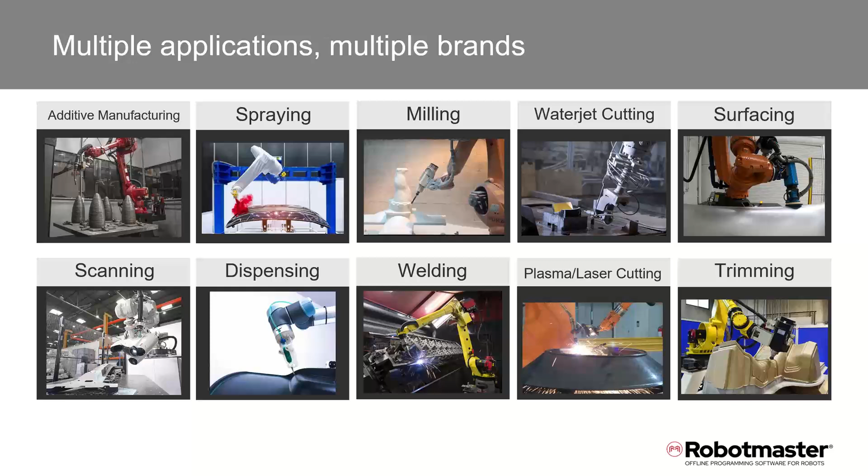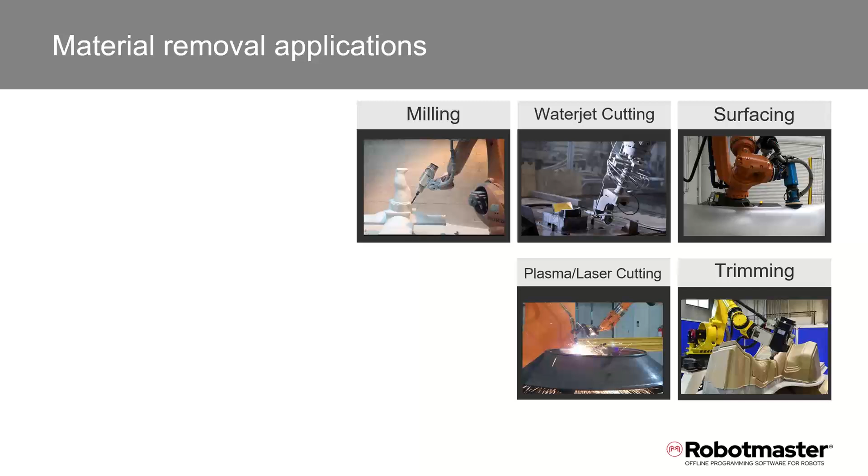Thank you, Jackie. As Jackie said, my name is Corey John. I'm one of the software sales managers here with Hypertherm and the Robotmaster product line. As we jump into the presentation, I believe most people are aware that many of the manufacturing applications you see today on the shop floor can be automated. One of the big pushes we see in the marketplace today is around the material removal applications. This can be anywhere from plasma cutting, water jet cutting, milling, trimming, and even surface applications. Today we'll be focusing on the surface applications, which can include things like deburring, grinding, sanding, and polishing.

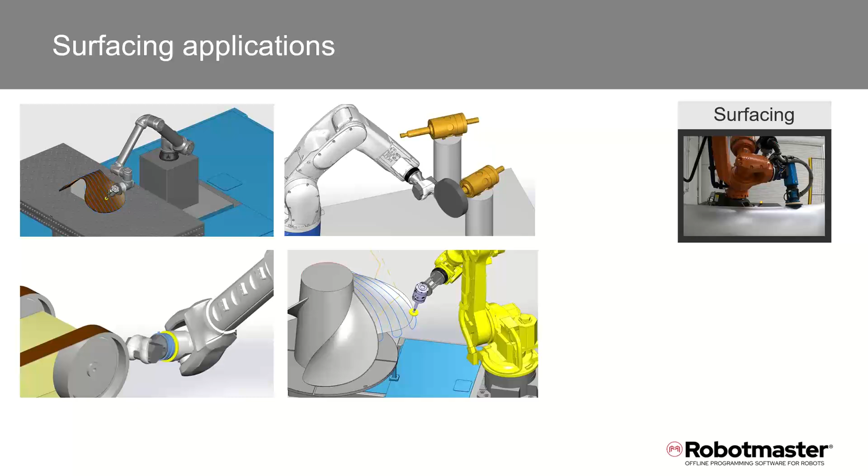To help deliver a wider breadth of expertise in this field, we invited one of our partners, 3M, to join us on this webinar. They will talk about handheld abrasive operations versus robotic abrasive applications. I will then discuss the different methods that can be used to program an industrial robot for these applications and go over some of the considerations you should make before selecting a method. We will then discuss the specific customer situations, the challenges they were facing, and how the solution helped them overcome the challenges. With that said, let me pass it over to Nathan from 3M for this next part.

Thanks, Corey. Yeah, my name is Nathan Herbst. I'm an application engineer with 3M's Abrasive Systems division, focused on robotics, particularly in the sanding part of the world, heavily focused on automotive at the moment, but I spent a lot of time as well with Scotch-Brite and random orbital sanding.

So here's a list of a variety of different terms that are commonly used for abrasive applications. As you can see, there are quite a few that can lead to some ambiguity. Terms such as blending, radiusing, finishing, sanding, and surface preparation can have different meanings to different people. We've tried to make this a little more clear by defining our 7 primary abrasive applications.

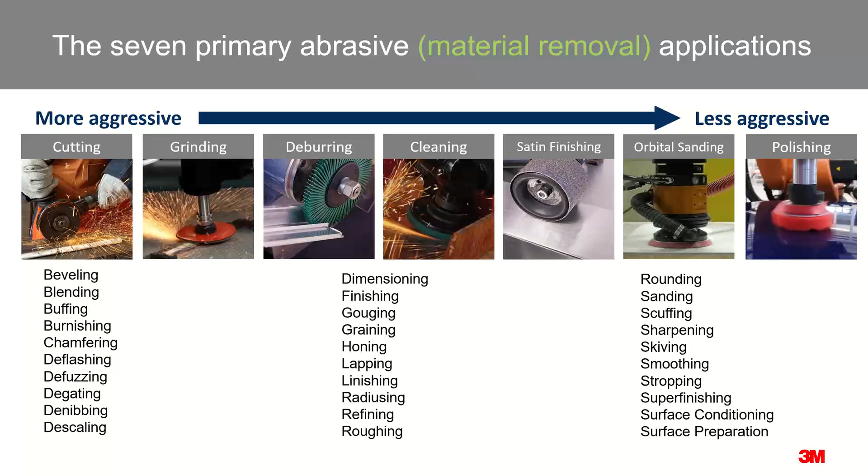So what is orbital, or in this case, random orbital sanding? The primary goal of any sanding operation is to generate a matte or nonlinear surface finish. Usually used to make a dull finish free from visible linear or rotary scratches. Often the type of surface left from orbital sanding is really ideal for applying coatings such as paint or lacquer.

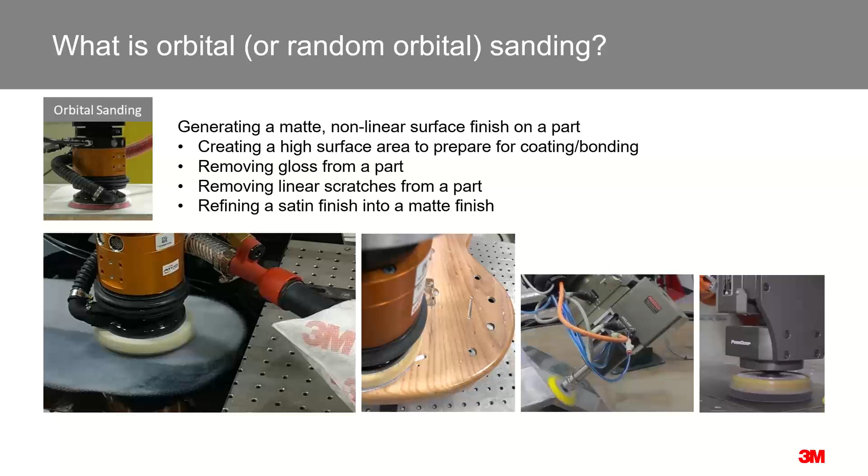Consider an aerospace fuselage or wing, wind turbine blades, things like that, where they're going to get the composite material scuffed prior to coating, painting, a variety of different coatings that can ultimately end up on it. Other applications like are shown in the images here, say a guitar body where we're refining polyurethane. So the polyurethane is applied, it comes on with orange peel, we need to knock that down and then bring it up to a high luster finish with a polishing process.

Most common abrasives used for orbital sanding tend to be coated abrasive discs or sheets. These are conventional abrasives applied over paper, cloth, foam, film backings. The most common grades, think of that 80 to 240 grit range. These are commonly used in wood and composite finishing and sanding.

For finish consistency and long life, we also offer micro-replicated abrasives and non-woven products. These can be used for solid surface finishing, particularly the micro-replicated materials for consistency over time. Similar technology is also used on clear coat finishing and refining, denibbing. Non-wovens are often used to leave a matte or final finish on stainless steel, also in that composite scuffing space.

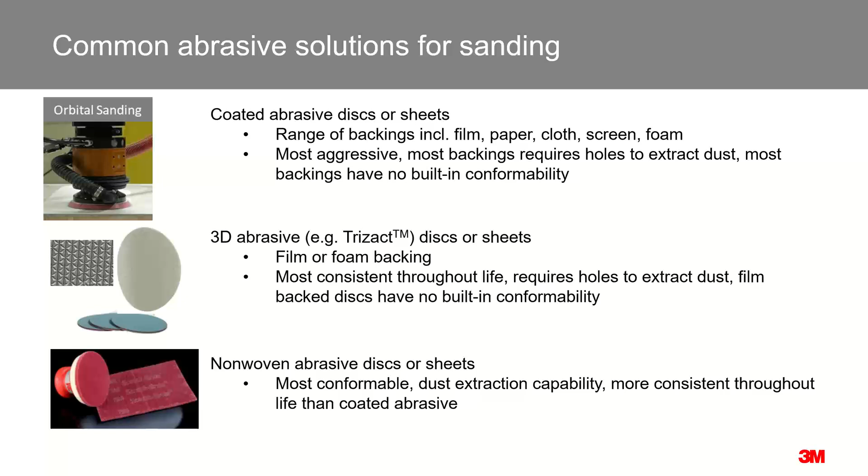A lot of these tend to be attached with PSA or hook and loop, and usually there is some sort of built-in compliance, either in the holder or backup pad, or the abrasive itself, like in the case of Scotch-Brite or the foam Trizact discs. Now, that flexibility allows the abrasive to conform and follow part contours if necessary.

When designing an orbital sanding process, you can see some of the key factors here, but 2 of the very important considerations are the finish requirements and part geometry. It's common to sequence abrasives using progressively finer solutions. Think of finishing a door or a table. You start with 60 or 80 grit to remove surface imperfections or maybe existing materials. Work your way up into 240, 320 grit to apply stain and then new polyurethane.

It's common to sequence all of them, depending on which ones you're working with, but multiple steps until that final surface finish is achieved. And that's really what is important to understand, is where do you need to get, and also where are you starting. That can really determine the number of steps that are needed. Orbital sanding tools can come in a range of orbits. Larger orbits provide more aggressive cutting action, while smaller orbits tend to generate a finer, duller finish.

As I mentioned before, the contours of a part are critical to orbital sanding, so taking the complexity of the part into account, particularly any sort of curved surfaces, can dictate the tooling necessary. That could be interface pads, backup pads, if you need a flexible material, things along that nature.

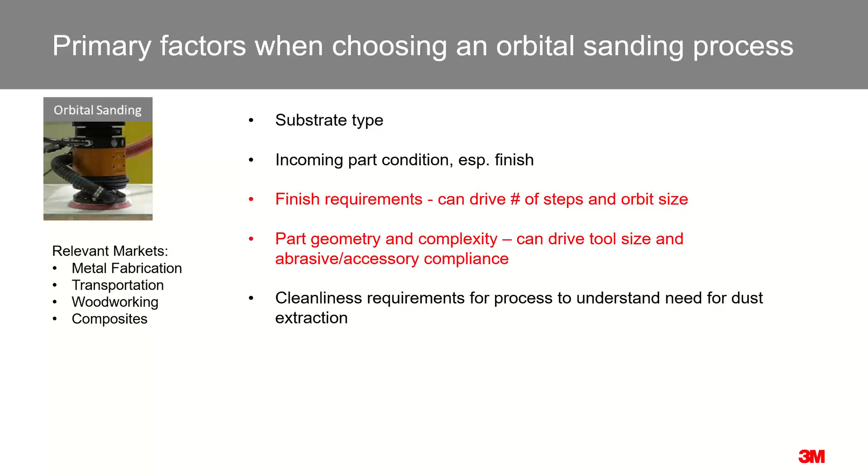Orbital sanding is one of the most common robotic abrasive processes, particularly because it tends to be one of the easier ones to implement. Not to say any of this is really easy, but there are still a range of important considerations for successful deployment. Once again, we note that force control is important, with some of that coming from the built-in compliance we mentioned earlier in the foam and non-woven products.

However, as you work on more complex geometries where parts or tool orientation will vary significantly, it may be required to have active force control. That being, it accounts for tool orientation relative to gravity. So as you go around a part, you know you're maintaining a consistent force.

Similar to a cleaning operation, it's common with orbital sanding to generate a fine dust. So addressing the capture of that dust is important, not only for maintaining cell cleanliness, but also to evacuate dust from the abrasive and part interface, which is where the disc is actually doing its work. If dust builds up there, you can cause loading and lack of cutting or disc life.

The abrasives typically used for orbital sanding need relatively frequent changing. So it's also important to consider automated media changing solutions with the robot cell design for successful deployment.

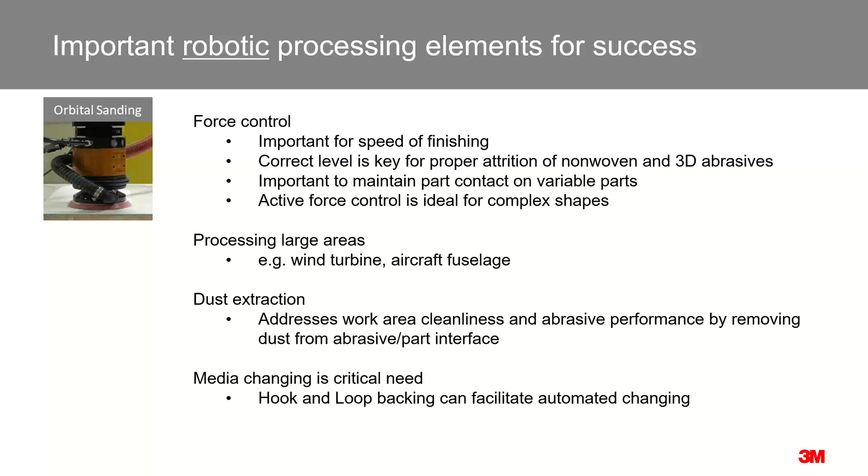Once you've selected your system, now it's time to consider all the factors that you have available. Robot feed rate, how fast you can go, will really be dictated by the cycle time constraints that you have. How many parts are needed produced per hour? It gives you an idea of how fast the robot has to move to get that done.

How much force should be applied? So this can be variable depending on where the disc is throughout its life or where on the part you are. Say if you're on a large flat area, you can push harder. You may want to dial that back as you're going across curved or sharp edges. Spindle speed, how fast should the abrasive be spinning? Higher RPM, higher cut rates, lower RPM, lower cut rates, although coarser surface finish.

What orbit should be chosen? Is it a more aggressive blending or removal step, or is it more of a final finishing process? Now that can affect from, say, a 1/2-inch orbit all the way down to maybe a 3 millimeter orbit. Sorry to mix up systems on you there, but think of a large orbit like a buffer or polishing type of tool compared to a very fine orbit like a jitterbug.

Finally, are multiple passes needed to help normalize the cut rate, say knowing that a new disc cuts faster than an old disc. So if you're running something where the disc needs to be changed throughout the part processing, you'll want to make sure you start from the point that the last disc ended and work your way backwards. That allows you to normalize out that cut rate over time.

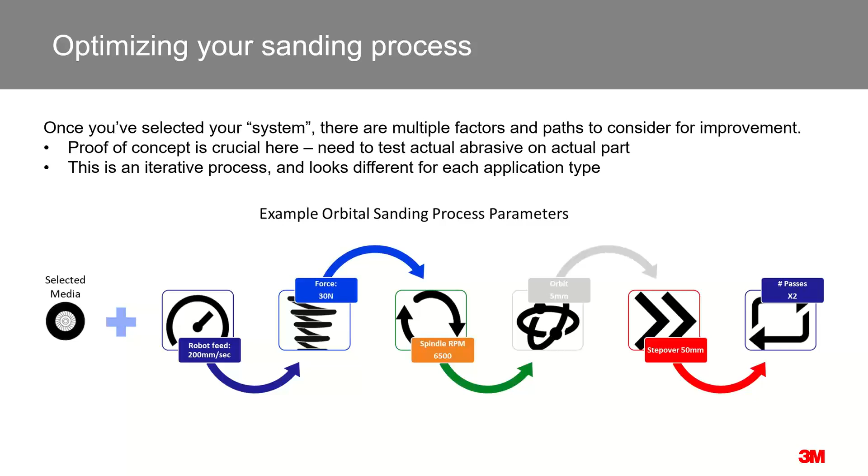Orbital sanding on very large surfaces, such as an aircraft fuselage or wind turbine, is pretty common. So it's typical to see operators really trying to climb all over these parts, sanding with a 5-inch orbital sanding tool. With robotics, they're ideal. They can reach farther than people can. They have longer arms, so they can cover a much larger area with tooling that may be much heavier than a human operator can handle. So maybe you could have multiple heads mounted on a gimbal to follow different contours.

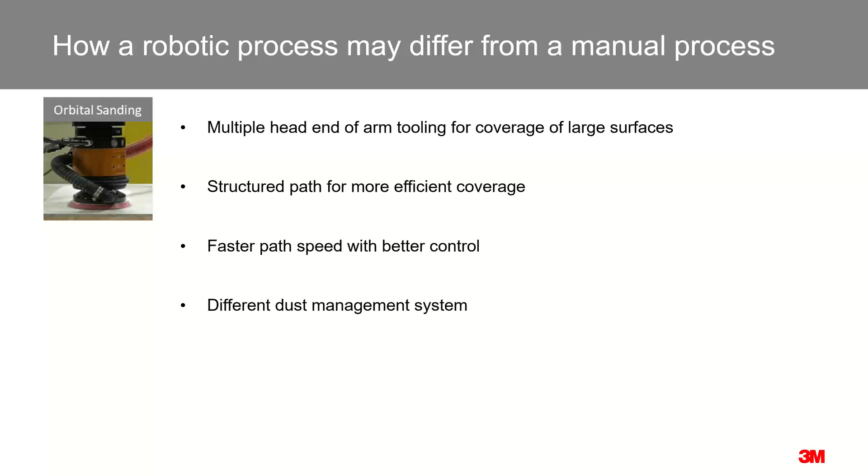All right. Did that execute? There we go. So thank you. Thank you very much, Nathan.

So one of the things that you need to decide once you've decided to automate your processes is how are you going to program the robot? There are a lot of things to consider, but really we've narrowed it down to just 4. The first thing, and probably one of the biggest ones for customers, is the learning curve, as downtime costs money. You want a solution that is quick to learn and leans on the person's process expertise to use the robot as just another tool in their toolbox.

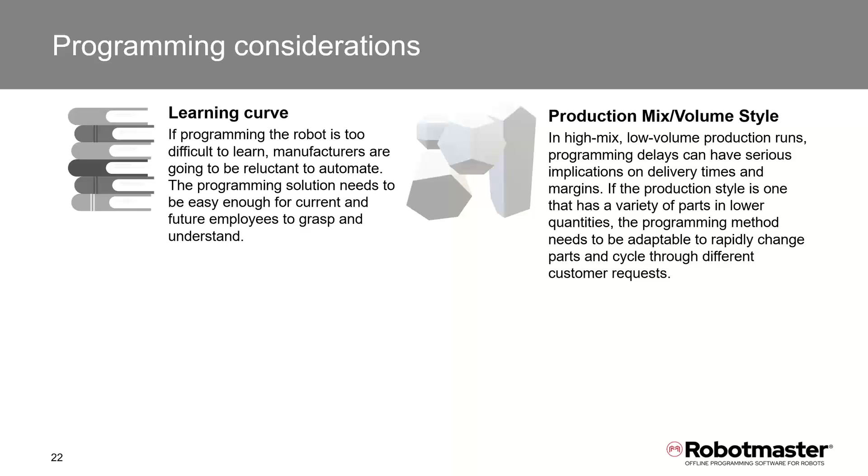The second is the production style. You'll need to look at if you're going to be running parts like a job shop or a prototype lab where you could be processing runs of maybe 1, 10, 100, or even 1,000 with a high mix, low volume model. Or will you be doing runs of 100,000 plus in a production run or an assembly line?

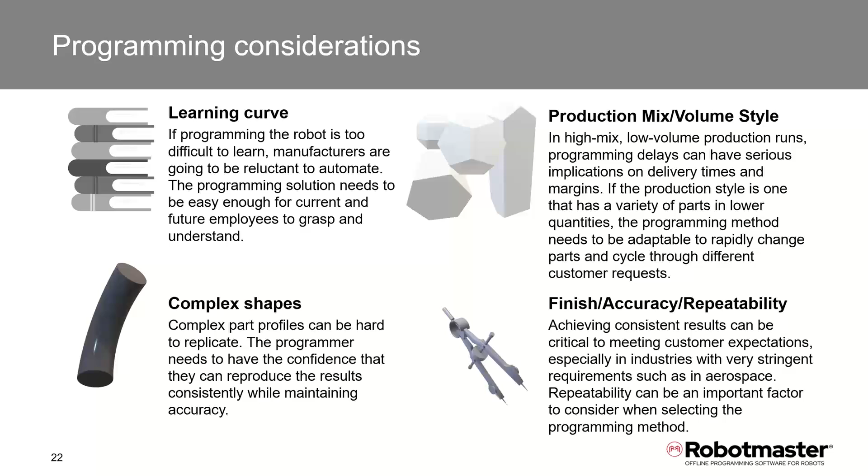The next thing is complex shapes. The company will need to review the types of parts that they are working on to see if the programmer can have the confidence to be able to reproduce the results consistently. And finally, the finish and repeatability. Being able to meet the customer's expectation with stringent requirements, such as in the aerospace industry, can be a big deciding factor when selecting a programming method.

So when you're looking at programming a robot, really there's 2 main programming methods. The first one, and the one that you see out there quite a bit, is the teach-pendant programming method. This method involves using a controller at the robot and has the end user match up locations with the robot tool to the part by visually moving the robot to a precise location and recording a point. This method can be time consuming and is only as good as the programmer's eye.

Once the project has been taught with the controller, the output is a program that is specific to that brand of robot and that specific robot arm and cell. The second one is an OLP software, or an offline programming software.

Similar to using a CAM software to program CNC machines, an OLP software is a popular programming method in the industrial robot space. Offline programming software enables the user to program the robot on a computer. Since this action is independent of the hardware, you don't need to take the robot out of production to program. By importing the CAD model of the part, the software can automatically generate the path trajectories and create the programming in a matter of minutes.

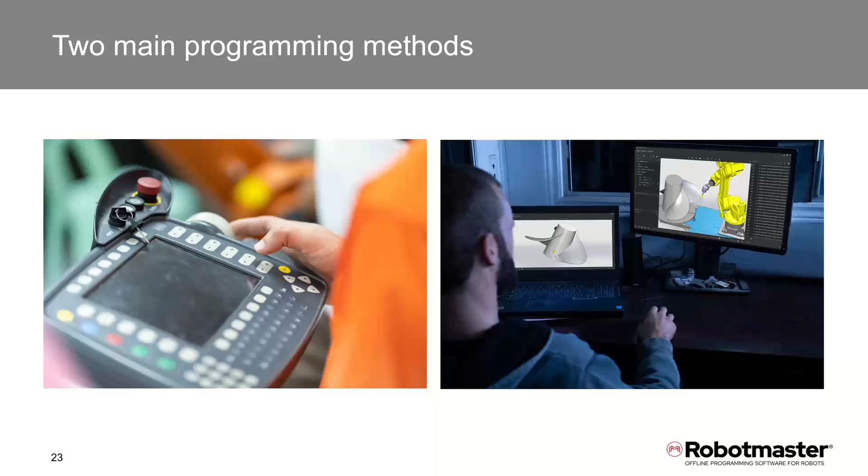The OLP software also provides programming optimization and validation through the virtual simulation environment that matches the real-world robotic cell to ensure the generated program is error-free and collision-free. So let's look at the teach-pendant programming against the 4 considerations that we discussed earlier. The first one is the learning curve.

First, it requires somebody with robotics expertise and coding expertise. So not only are you jogging the robot around to find the specific location, the correct tool vector, and staying normal to the surface, but once you've created all the points, you have to understand the syntax, maybe entering some logic or some macros to be able to get the program to run correctly on your robot. It's also a trial and error process to achieve desired results, even with the most experienced user.

And teach-pendant programming is very language orientated for each robotic brand. When working with complex shapes, it can also create issues with hard to reach areas and can be very problematic and time consuming when programmed via teach-pendant. You also increase your risk of collisions between the tool and the robot and the part. Production style is a big one, as in low mix, high volume applications, this method offers an excellent ROI. A single programming job can sustain production for a long time.

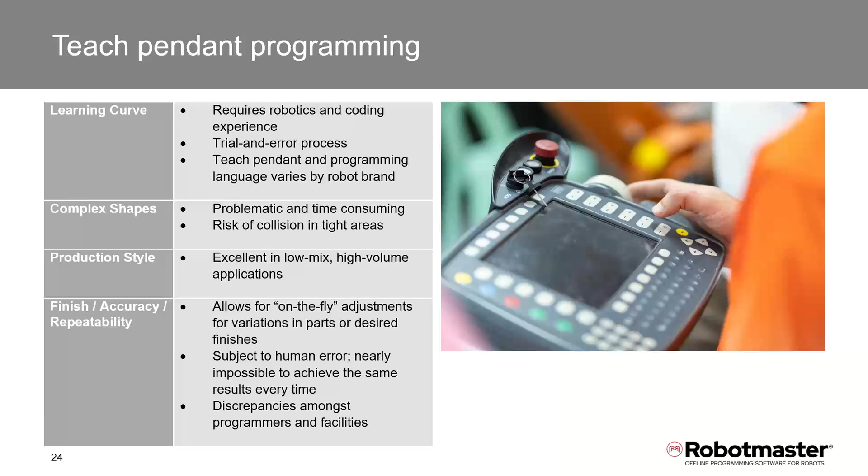And finally is the repeatability, as it allows for on-the-fly adjustments for a variety of parts or desired finishes, and is subject to human error, making it nearly impossible to achieve the same results every time. Now let's compare this programming to an offline programming software and the 4 variables. First one is the learning curve. Most offline programming softwares are easy to use and easy to learn and have a workflow for users with little to no experience in programming robots in the past.

Really what it requires is somebody to be comfortable with using a computer. You really don't need to be a robotic expert to program. It includes easy-to-use optimization and error-free correction tools. It uses the same programming interface for all robots, eliminating the need to be familiar with multiple different systems.

When it comes to complex shapes, offline programming software is generally built with powerful tools that make programming complex parts very easy. Robotmaster, as an example, includes tools to automatically optimize the path to avoid collisions, robot errors, and reduce cycle times. This solves a lot of issues when programming complex part profiles, making it easy to program the hard-to-reach areas.

And the production style. In high-mix, low-volume applications, programming time is extremely impactful to margins. The ability to quickly and flexibly program more jobs also greatly improves productivity. Finish and accuracy and repeatability. An OLP software takes the CAD to path approach. The program can be created based off a feature of the CAD model.

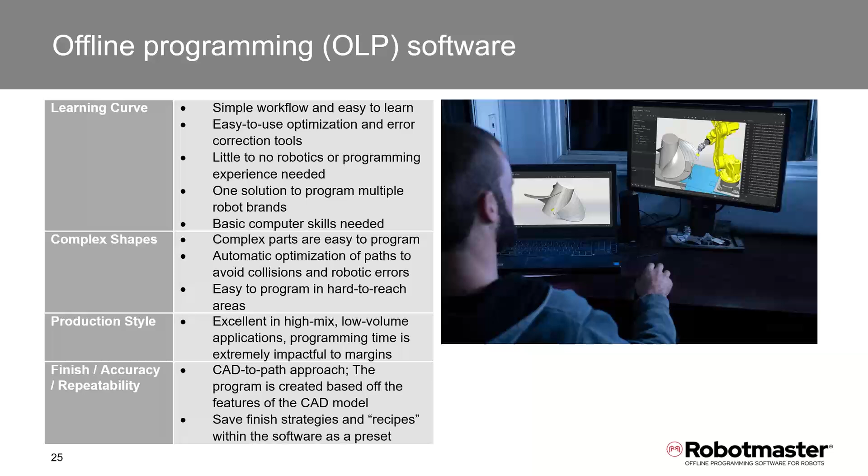And some OLPs like RobotMaster give the users the ability to save the strategies, or what we call recipes, in a programming library that can be later called upon and distributed across many facilities. So once again, how does an offline programming software work? The first thing that you do is you bring in your CAD model, right? So you have a CAD model of your part.

From there, you use all the information that's built into that CAD model, all the different surfaces in there, and are able to use that information to drive the trajectories or the tool vectors to make sure that you're normal to the surface. So very easily being able to create complex paths on there. From there, once you have the paths that you're happy with, you can bring it into the simulation environment to take a look at, am I going to have any robotic issues? And if you do, have the tools to help automatically fix those.

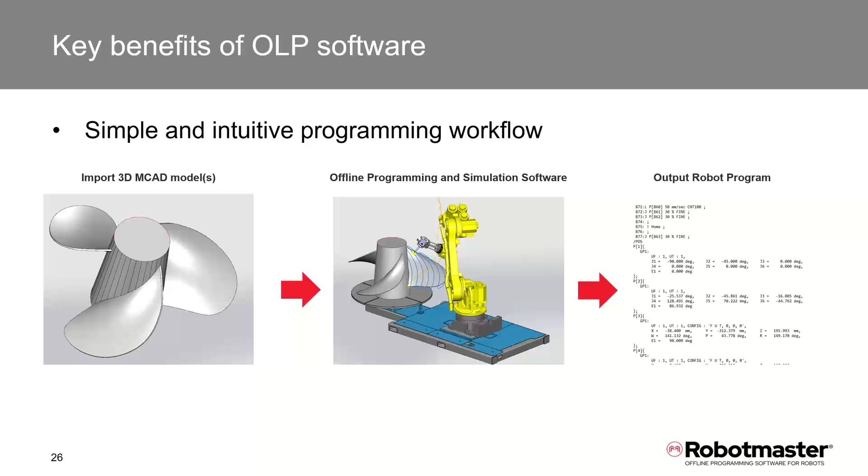And once you have a program that you're happy with and it's error-free, you have the ability to output the code for whatever robot brand that you're looking to use. Another key benefit, especially in surface finishing, is the ability to take a root path or a straight path and add in different kinds of strategies there.

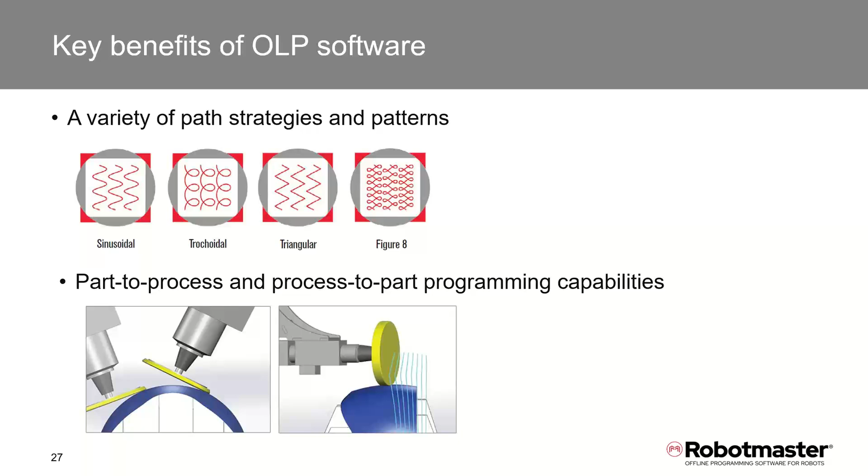So where trying to program a figure eight or a triangular path with a teach pendant would be virtually impossible, for us it's just a one-click method. So adding in, from those straight lines, the figure eights, the triangular or trochoidal is very easy to do.

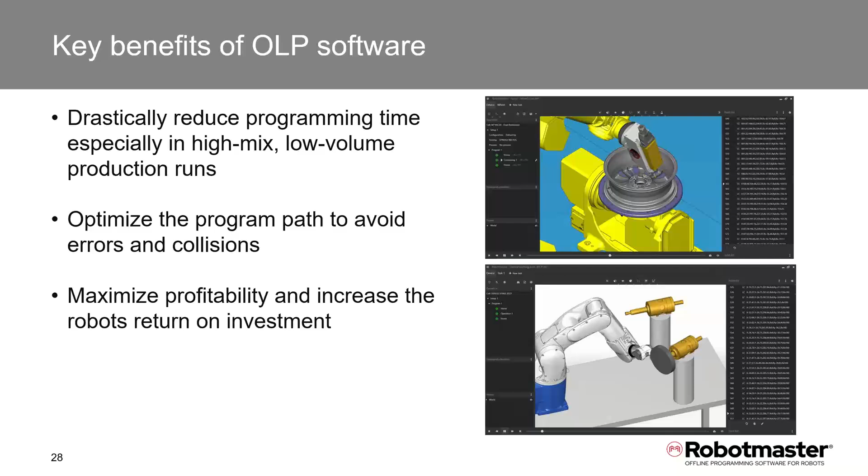Another key benefit of the OLP software is really it drastically reduces programming time and effort when it comes to the high mix, low volume production runs. Optimization of the path also avoids errors and collisions, maximizing profitability and increasing the robot return on investment.

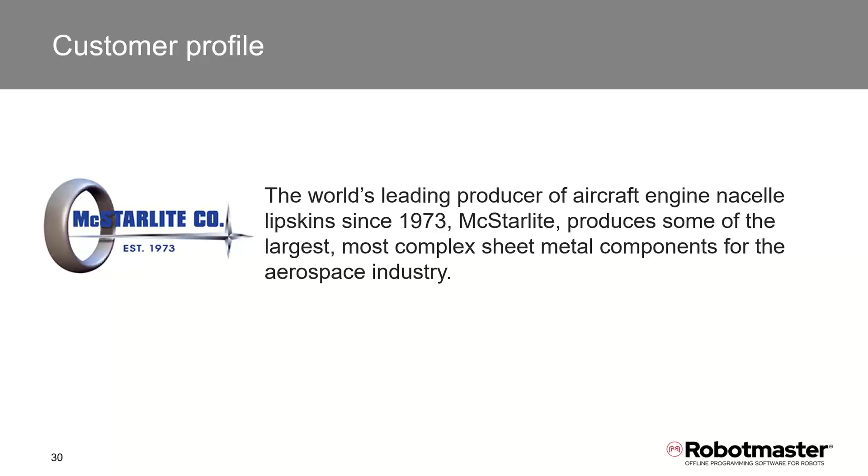So let's talk about one of my customer journeys when it comes to automating a surfacing application. McStarlite, the world's leading producer of aircraft engine lip skins since 1973, based out of California, produces some of the largest and most complex sheet metal components for the aerospace industries. McStarlite was looking for a way to improve their polishing application, as it has been done by hand, which takes a physical toll on workers and is very time consuming.

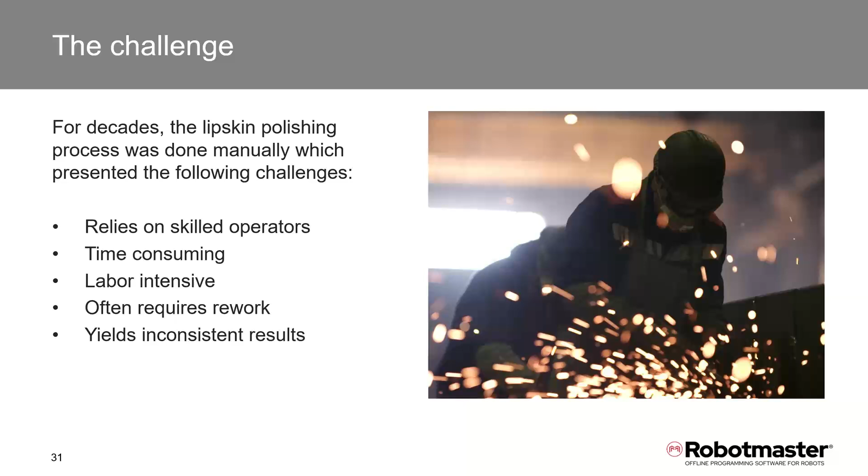Another downside to hand polishing the part is inconsistencies. A surface finish is only as good as the skill of the individual labor, and components have to be reworked to meet the stringent requirements within the aerospace industry. This additional rework and cycle time cuts into the profitability of this operation.

In 2020, McStarlite invested in automation by integrating a KUKA robot cell coupled with RobotMaster to perform the lip skin polishing application. For those who are not aviation experts, the lip skin is the aerodynamic structure that makes up the leading edge of the airplane's engine. With automation, they are now able to deliver consistent and accurate parts at a fraction of the time, ultimately allowing them to meet the demand and the stringent requirements from the aerospace industry.

RobotMaster's ease of use and flexibility enabled the McStarlite team to manipulate process-specific parameters and achieve the optimal feed rates, RPM, and forces for each one of their passes. Alongside the improvement in their production, enhancing working conditions for the laborers and operators was a priority for them in looking at their next investment for their organization.

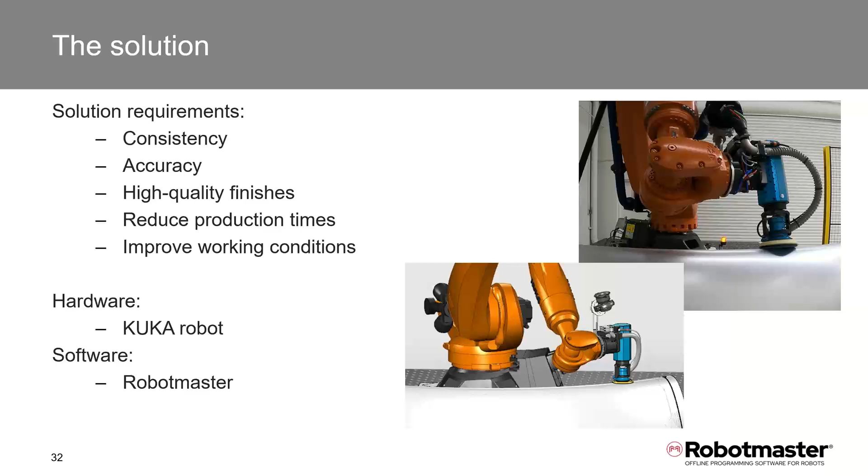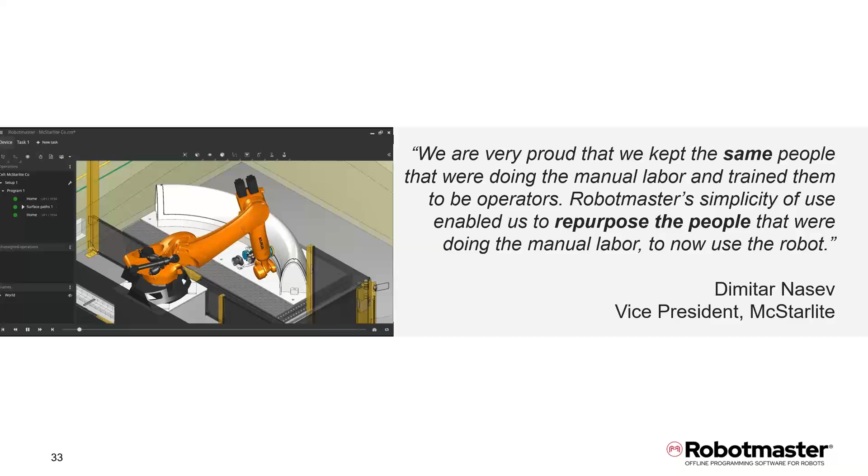The type of manual labor being performed prior to automation was very hard on the laborer's back, legs, and even arms. It was a priority for McStarlite to provide a better working environment to its people, which is why a user-friendly tool like RobotMaster was the ideal choice. Working with the vice president at McStarlite, he had said that we are very proud to keep the same people that were doing manual labor and train them to be operators. RobotMaster's simplicity of use enabled the repurposing of people that were doing manual labor to now use the robot.

The opportunity to reduce cycle times and increase production is a key feature in OLP software. The unique value that RobotMaster delivers for McStarlite is not just the simple-to-use interface that allows an operator with no previous experience programming robots to be able to do so, but the path optimization and capabilities that change the game for them. RobotMaster provides instant feedback of issues and opportunities to quickly obtain optimal robot programming.

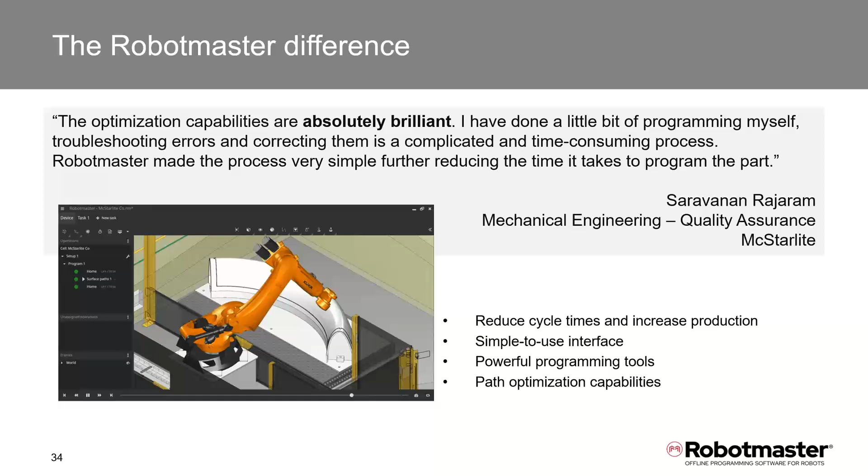Instead of the frustrating hit-and-miss approach, operators can quickly and easily ensure their programs are error-free, and high mix, low volume production facilities especially benefit from this technology as it greatly improves their cost efficiency. Saravanan in Quality had said that automation is something that they had been wanting to do for decades. It's a lot of planning and CapEx. However, the automation allowed them to standardize the finish and the consistency and improve their cycle times.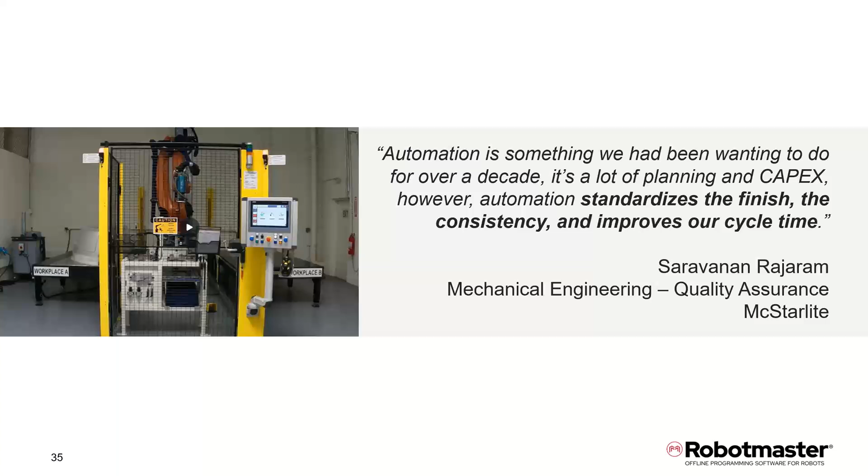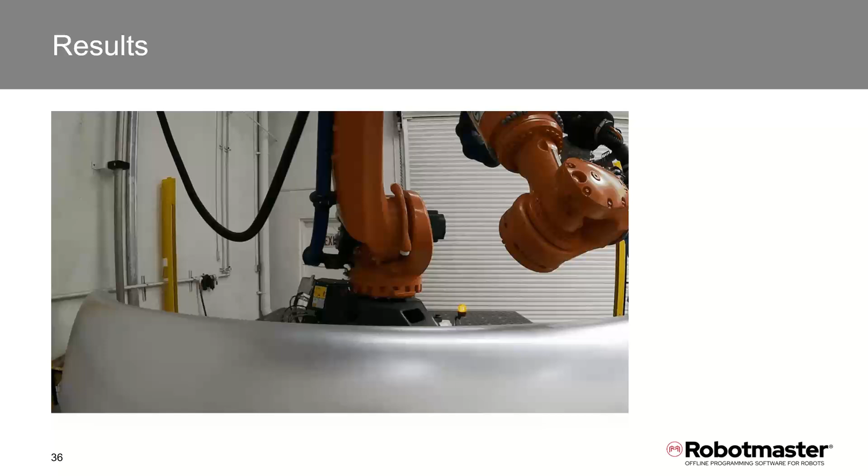By taking a leap into automation, McStarlite can deliver consistent high-quality parts to Airbus, reducing cycle times and meeting the demand for the polished lip skin. Now being able to maximize profits and quote lower prices on future programs, McStarlite can be much more competitive and take on new opportunities and projects. They have plans to add additional robot cell components such as a rotary table to enable them to polish larger products such as full engine cowlings. We look forward to being a part of their journey as they continue to expand their capabilities.

Surface technologies for robotic material removal are enabling manufacturers to increase productivity and profitability and achieve higher quality finishes. Customers like McStarlite are seeing huge benefits, and we'd be happy to assist you as well in your transition to automation.